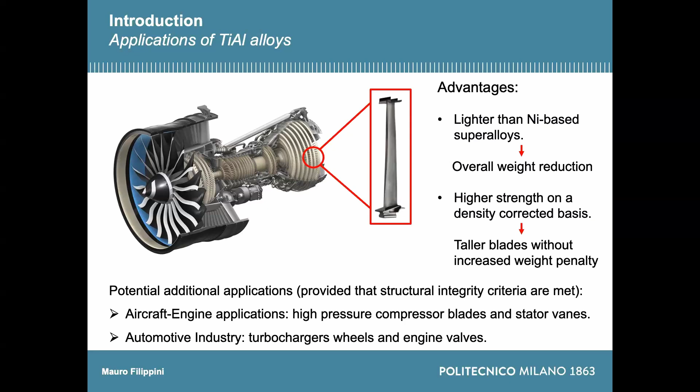There are new potential applications, but there is still debate about that. Again, in aero engines for high pressure compressor blades, but there is a limitation on that. And in the automotive industry for turbochargers and engine valves, mainly for motorsport nowadays, no longer for conventional cars.

The chemical composition is usually more or less a balance in atomic percentage between titanium and aluminum, and then you have additional elements to promote different properties like corrosion or oxidation resistance. This is the reason to introduce niobium and chromium, for instance.

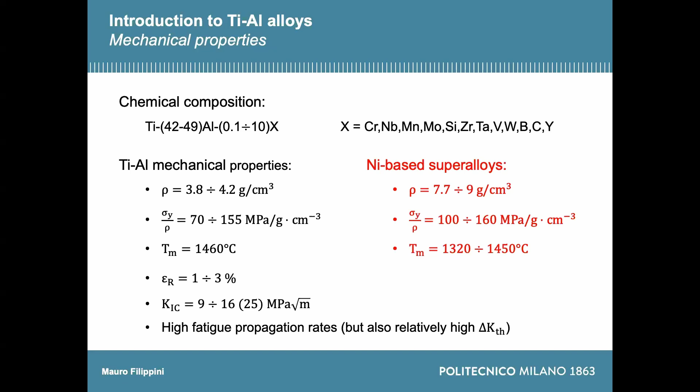The main drawback of these materials is that they are quite brittle. The strain to failure at room temperature is in the range of 1 to 3%. And the K1C, the fracture toughness, is relatively low. So you have a relatively higher delta K threshold, but the difference between the delta K threshold and the K1C is very narrow, very small. This reduces the design space very much.

So the main objective of this work is to highlight a few points. This is basically a side activity, a secondary activity we have performed on a high niobium alloy.

So you have 8% niobium, 2% chromium, around 45% aluminum, and the rest is titanium. We conducted this test with a non-standard subsize specimen at room temperature with a loading ratio of about 0.05. The main goal is to assess and understand how closure plays a role in fatigue crack growth threshold.

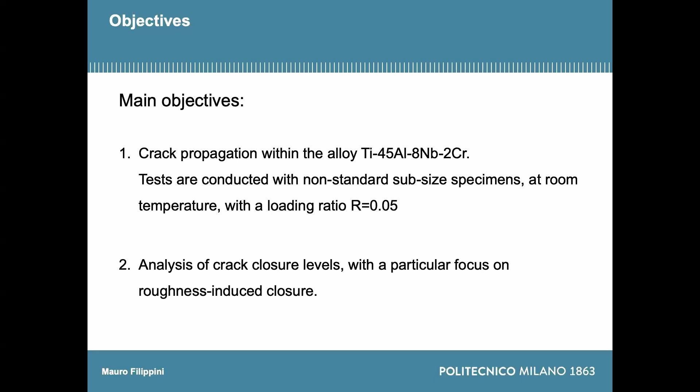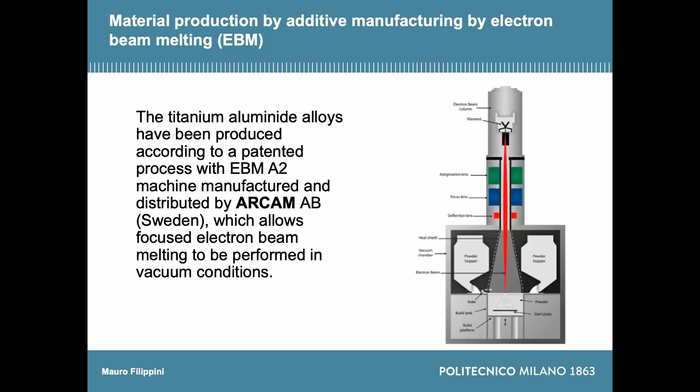The material is produced by EBM - it's not selective laser melting, it's EBM - and you need to produce the material in high vacuum in order to avoid oxidation and oxygen pickup by the material during production.

The final microstructure is this one that I am showing. It's obtained after EBM plus hipping plus heat treatment. So if you ask me about pores, there are technically no pores. This type of microstructure is not the target one - it's a mistake, I would say, in terms of microstructure. You would rather prefer to have a smaller colony size of your lamellar grains.

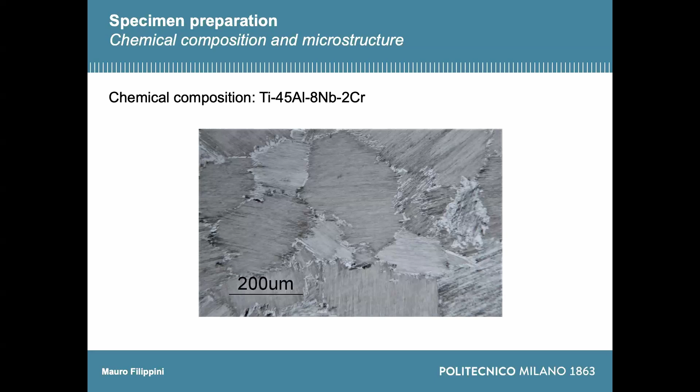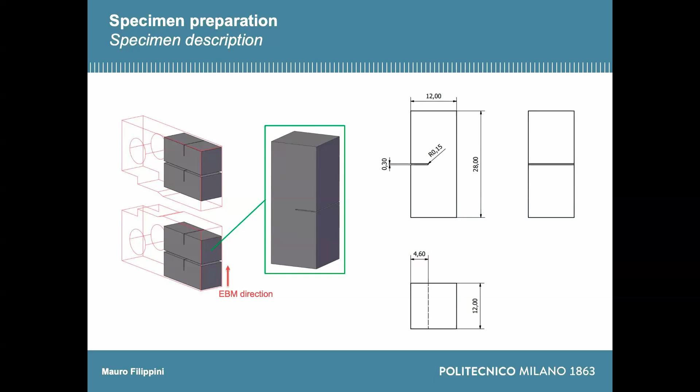Out of specimens left over from previous activity, we produced this small specimen that we pre-cracked. We generate a notch by wire EDM, and then we produce a crack ahead of this notch by compression pre-cracking. You cannot generate a stable crack in titanium aluminides without compression pre-cracking.

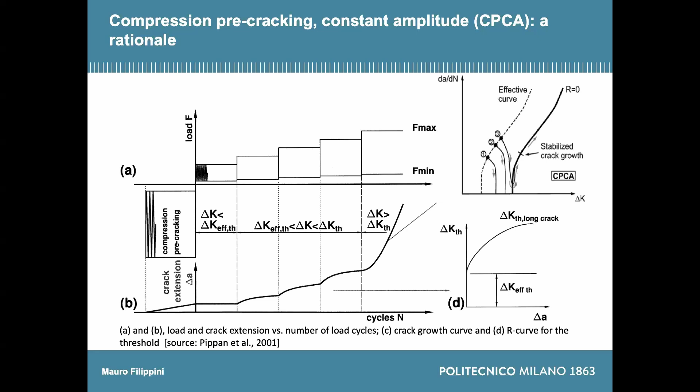You go back to the work of Subra Suresh in the late 80s, beginning of the 90s. And there has been major work by the group of Rainer Pippan in Austria, in Leoben, demonstrating that using compression pre-cracking, you can generate stable crack growth propagation in titanium aluminides.

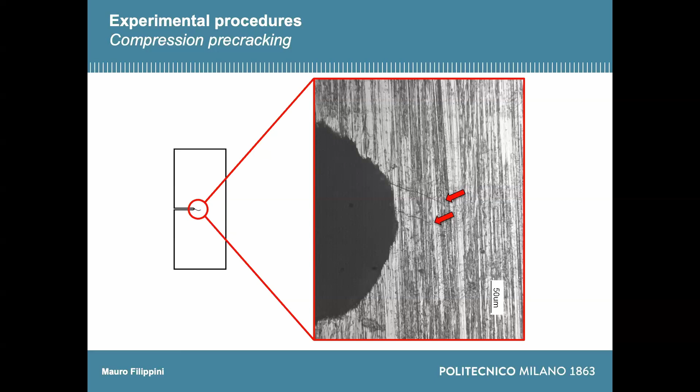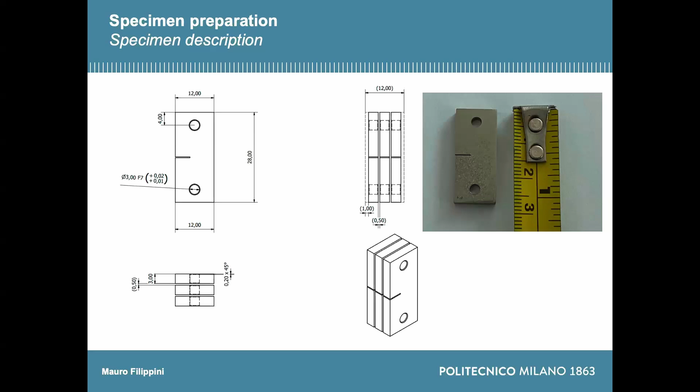These are the cracks generated by compression pre-cracking, tiny cracks ahead of this notch. After pre-cracking, the whole specimen, which has a total height of about 28 millimeters, we sliced into three small specimens. We produce a hole which is slightly beveled, and we started with a conventional fatigue crack growth test.

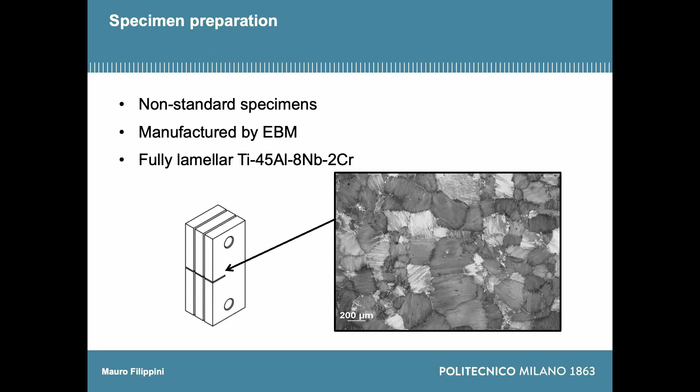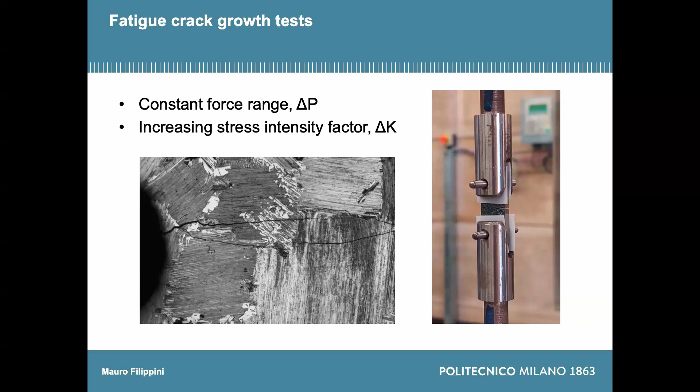This again is the microstructure ahead of the crack tip. We produced the test by constant force range, applying continuously increasing blocks, increasing the stress intensity factor delta K until we got stable crack propagation. So cracks are propagating in this way.

They are quite prone to go around the microstructure. So you have lamellar grains, and the crack is propagating through the lamellar grains - it's slowed down by the lamellar grains, or it's propagating quite fast through the lamellar planes.

These are observations also of other cracks that we had in other specimens. You can see that even though the loading is vertical, you get these slanted cracks that are propagating within the microstructure in a decohesive manner, trying to break up the lamellar planes.

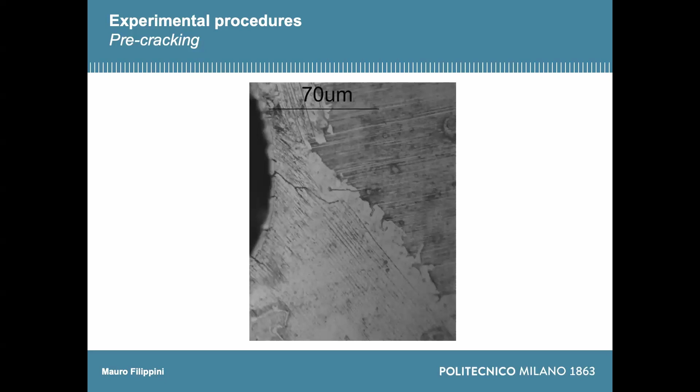I will go very fast through these images - it's a repeated concept. We performed the test in this way: we started with a block of loading, then unmounted the specimen, took pictures, remounted the specimen, and went on with the loading, increasing it a little bit each time.

It's a fastidious work by my master students that helped me to do this type of activity.

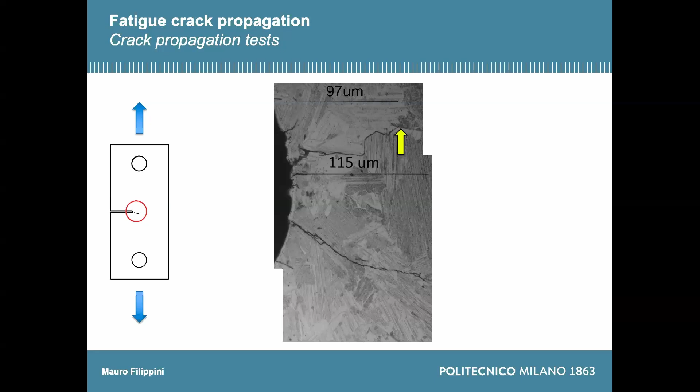You can see that in spite of some principal crack, there are other cracks already generated within this lamellar colony in this position. You don't see it, but there's a long crack going around, and the tip is about here. Again, this is evidence after a few cycles that the crack has propagated in this way. You just have to consider that this distance is in the order of a hundred microns.

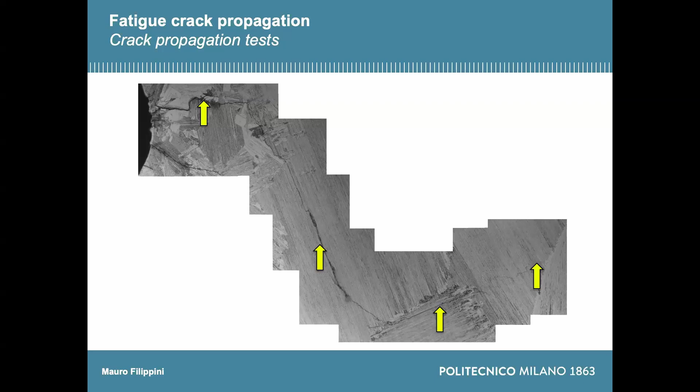And again, there is definite evidence of a big influence of the microstructure on crack propagation.

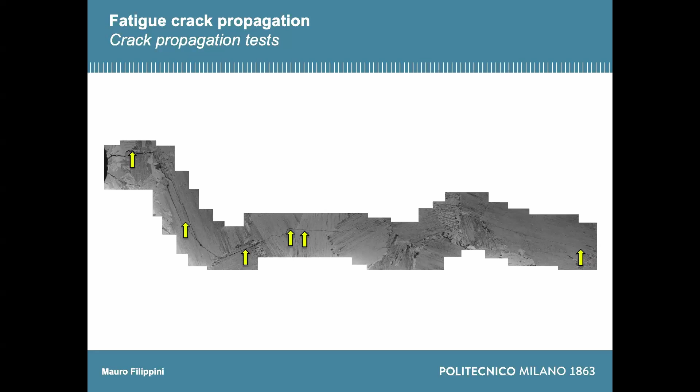Okay, so this is more or less the complete picture of this crack that has propagated through the microstructure. You can observe that you already have some translamellar propagation, and when the crack is going through the lamella grains in this way, it is slowed down. So you might have a threshold due to the fact that the crack has a translamellar fracture. So you have two mechanisms: the translamellar fracture and the interlamellar decohesion.

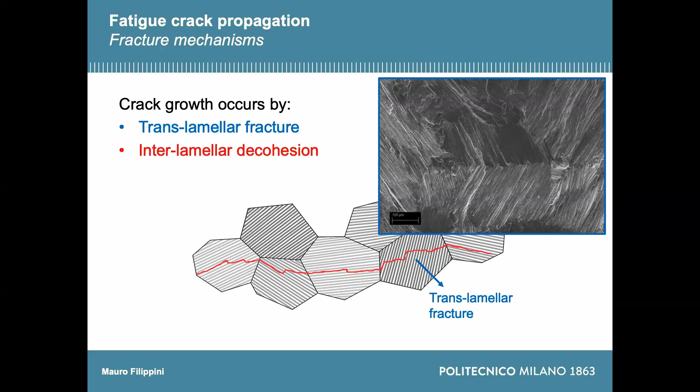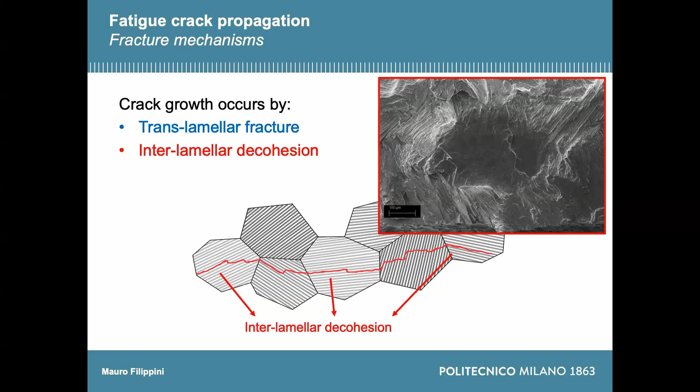The translamellar fracture you can observe on the fracture surface by this kind of image. And this is what is happening in interlamellar decohesion. So in this case, I would say that the material and the microstructure is the defect itself. So this is again the long history of this propagating crack through the microstructure.

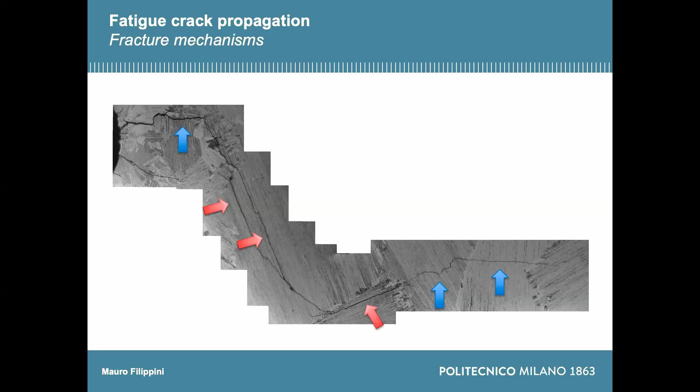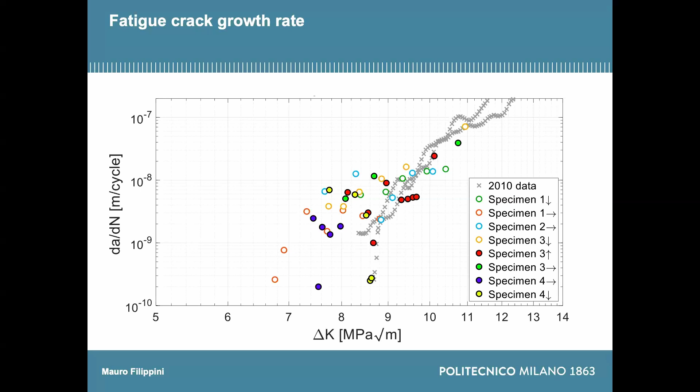So you have a marked effect of the microstructure on the fatigue crack propagation in this case. You can observe that the new data shows an increased propagation, then a reduction, then an increase of the crack propagation rate again, and a decrease, until you reach a definite long crack threshold. And if you want to propagate the crack definitely, you have to increase the delta K up to 10, 12 megapascal square root meter.

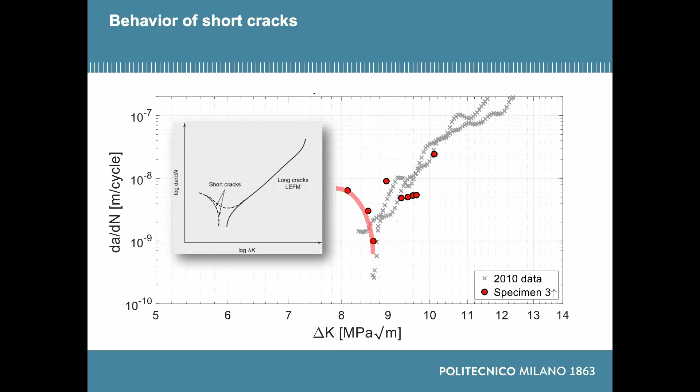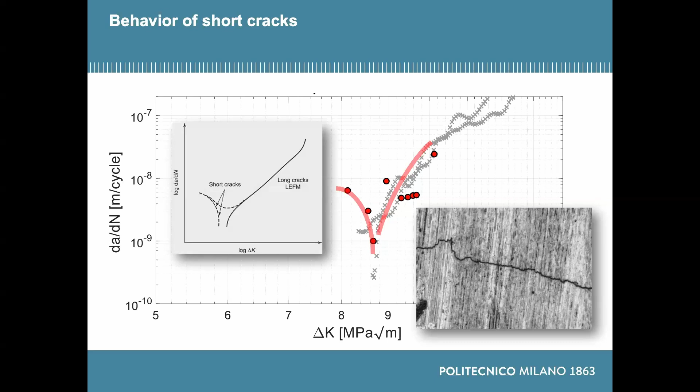So the rationale is depicted here. The mechanism is well known. You have a long crack growth threshold here, so you have short crack propagation that is slowing down, and then it accelerates when you increase the delta K, the available energy for propagation. Mainly this threshold is generated by a crack propagating through the lamella planes, when the lamella planes are perpendicular to the crack propagation.

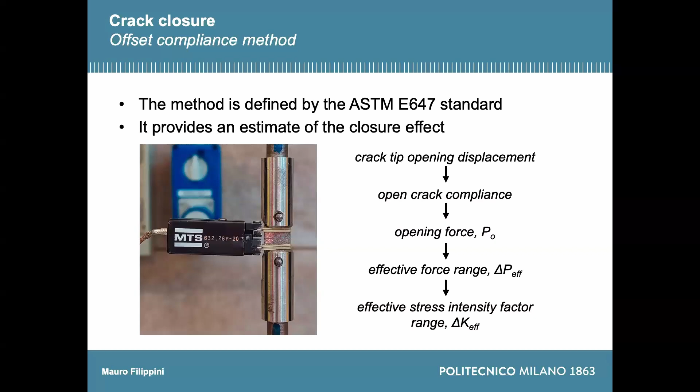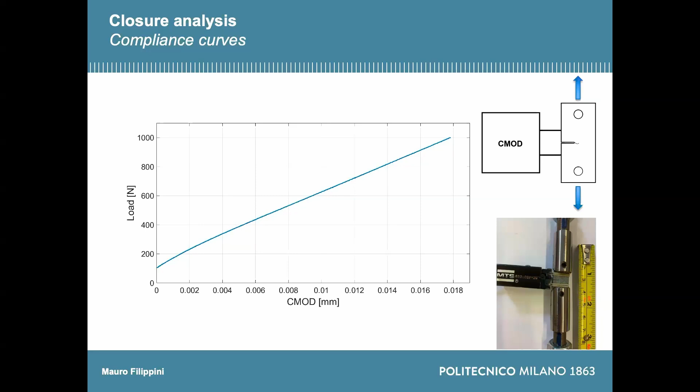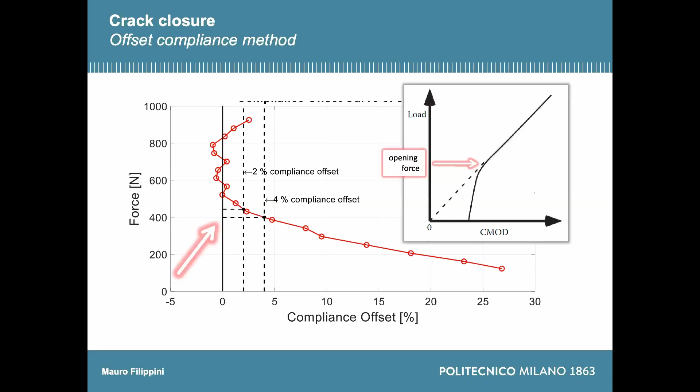So we needed to highlight how much crack growth closure we had for this growing crack. So we did the test according to the ASTM, even though we had this unconventional sub-size specimen. We used the offset compliance method to measure the crack closure level. This is quite standard, so I will not go into details unless you ask questions.

And we could measure a level of opening which is about 35% with respect to the Kmax. So you have a definite crack closure effect, which is remarkable.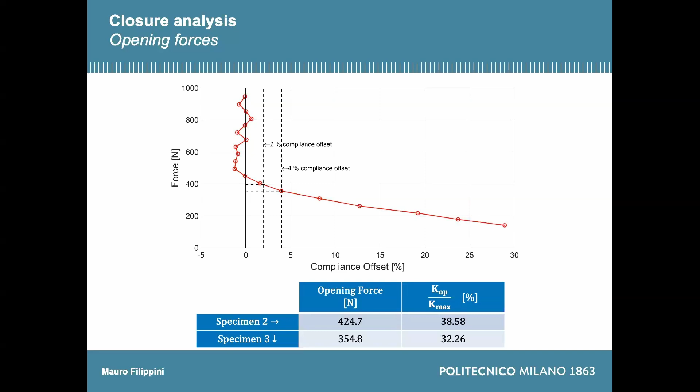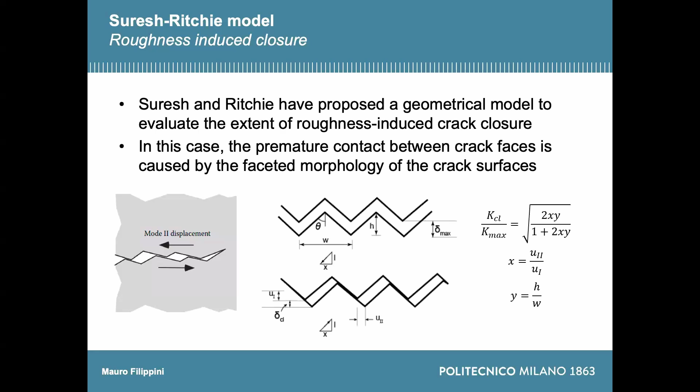So we tried to apply some modeling of this crack closure phenomenon by using the Suresh-Ritchie model, which is a geometric model. It's very old, so I will not detail that. Basically, you have to take pictures of your propagating crack and try to correlate this value statistically to the parameter of the model.

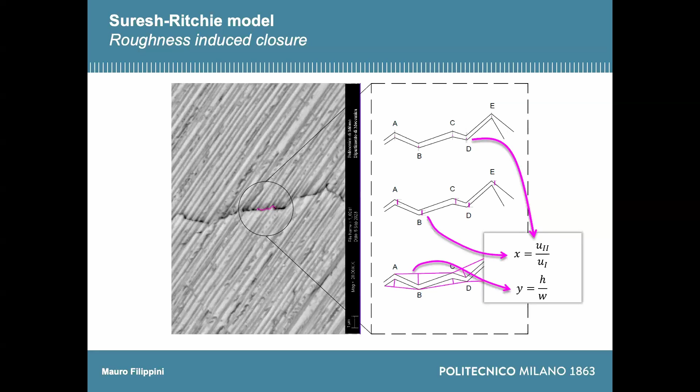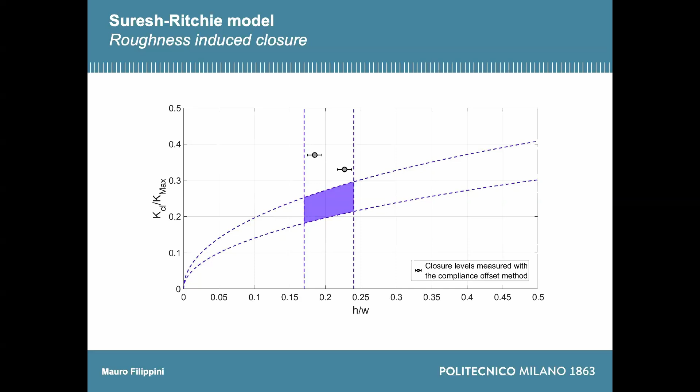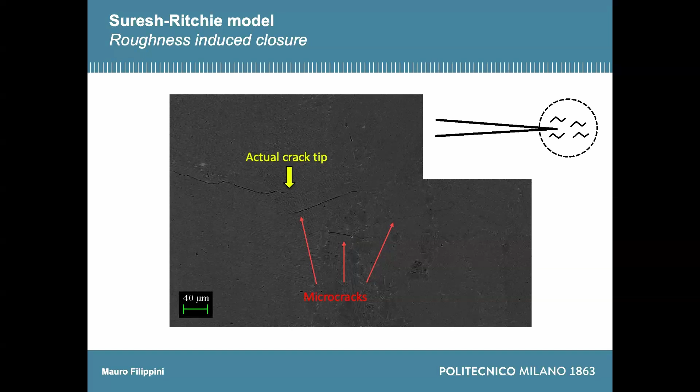By using this model, you can assess that your closure, according to the pictures, would lie into this blue area, but the actual measurement based on the offset compliance method gives you a higher closure level. The reason is that you don't have just roughness-induced closure, but other mechanisms taking a role, which is crack shielding. You have small cracks forming around the actual crack tip that are somehow masking the loading at the crack tip, and so you have another crack closure effect that is very hard to model in this case.

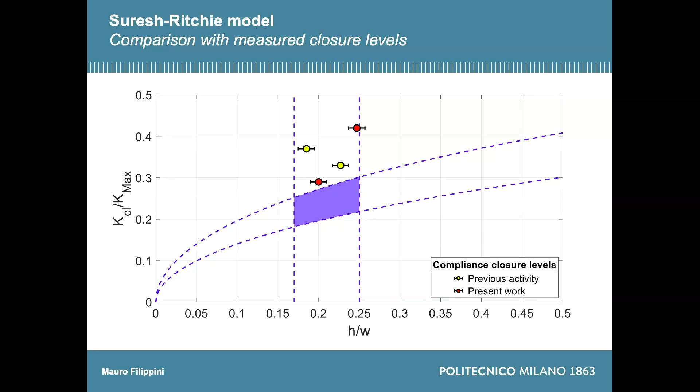So the new data are also in line with the previous data that we had in initial activity on this side, and this confirms that the pure geometrical, pure roughness-induced closure system is not capable of explaining everything.

So my conclusion up to now is that the crack propagation rate that we measured with this miniaturized or sub-sized specimen is consistent with the fatigue crack growth data that we previously collected on CT specimens. The lamella microstructure is responsible for an apparent strengthening mechanism that is bridging crack deflection, crack branching, and micro crack shielding all together, so it's very difficult to separate the single effects.

The coarse lamella microstructure is less resistant against the nucleation of new cracks, especially when the lamellae are perpendicular to the loading direction, so the cracks propagate quite fast through the first grains. And the cracks are allowed to propagate as short cracks for longer distances when you have a coarser microstructure.

And the intensity of this crack closure phenomenon is remarkable, because you have about 35% of closure with respect to the maximum loading in the region of the threshold. And according to the Suresh-Ritchie model, a significant part of the closure phenomenon can be attributed to roughness-induced closure, but that's not all. There is more than that, which is also difficult to highlight.